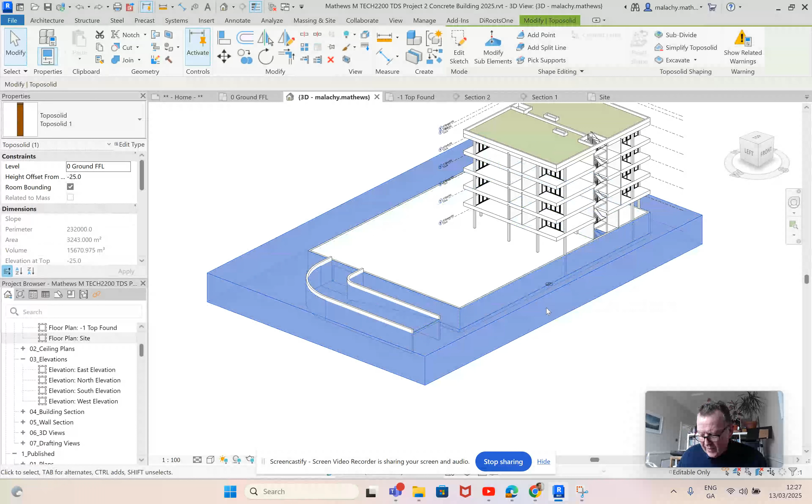Right, we've got our topo in place here. Let me show you how I did that. We've got our ramp in place. We're going into our site, and so we're going to put in a Toposolid.

Now, the last project that you'll be doing this year is one where you'll have a site in which you'll place your domestic building, your steel building, and your concrete building together, and I'll be supplying you with that site. But for this exercise, for the concrete project, we need a site, because there's nothing worse than having the building floating in mid-air. So we can always hide it or delete it when we go to the last exercise, and you'll just move the building onto the existing prepared site for you.

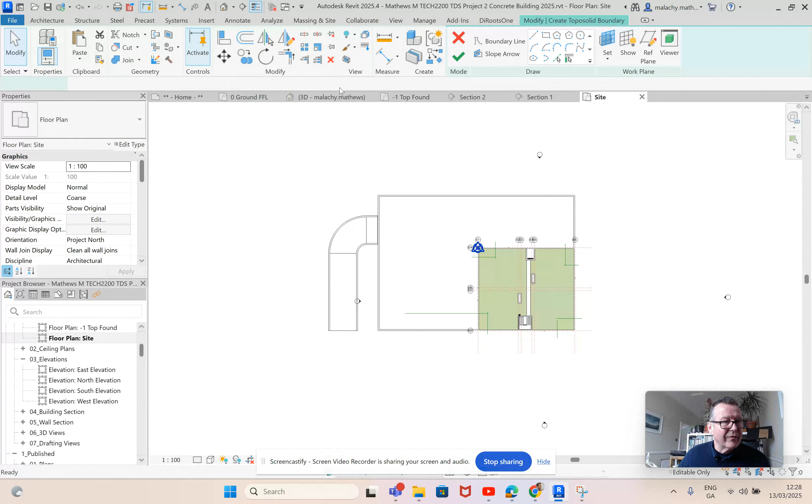So I'm into massing, Toposolid from a sketch, and I'm just going to surround the building something like so. Okay, let's go into the properties of this here and see what we've got.

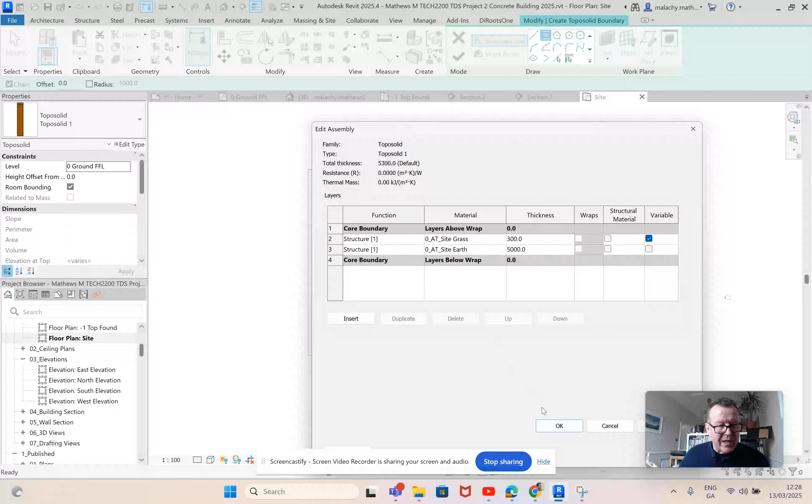So you might need to add in a couple of materials here. I put in the site grass at 300 and the site earth at 5 meters here. You'll find those materials in your materials library. Like so, and that's fine.

I've got a solid fill and a brown color here for the coarse scale fill as well. Now I'm going to put this in at -25, so it'll just come in below the slab here, and we'll finish that. Don't attach any walls here.

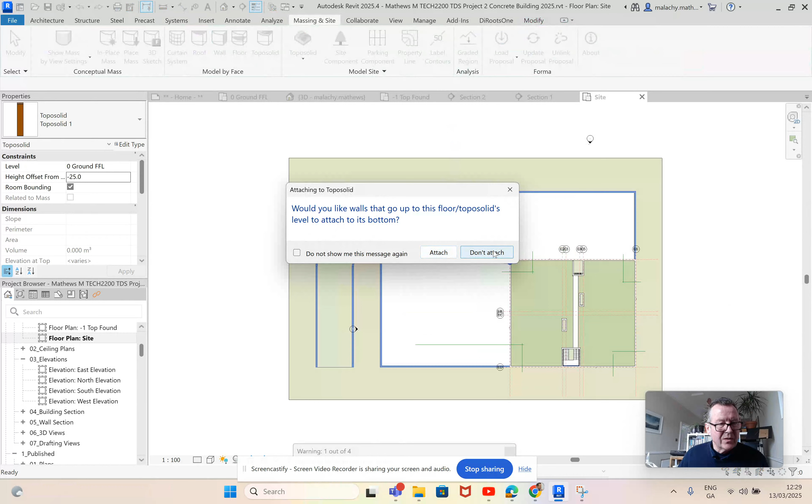Now let's take a look at that in 3D. So I've got my slab exposed here, and for me, that's the way I'm going to do this. If you were to put some grass in on top of this, you'd want a minimum of 300 mil in order for the grass to grow.

And if I had to do that, I'd have to drop down the level of the ground floor slab and all of that kind of stuff. I'm not going to do that - I'm just going to pave this area here.

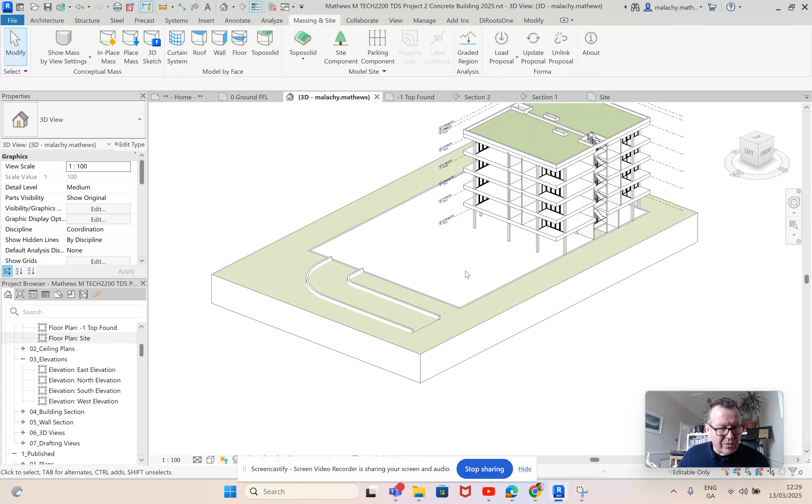So that's part one. Part two is if I go into a section now, you'll see where the problem is - we've got earth in our basement, and we need to get that out. So there's two parts to this.

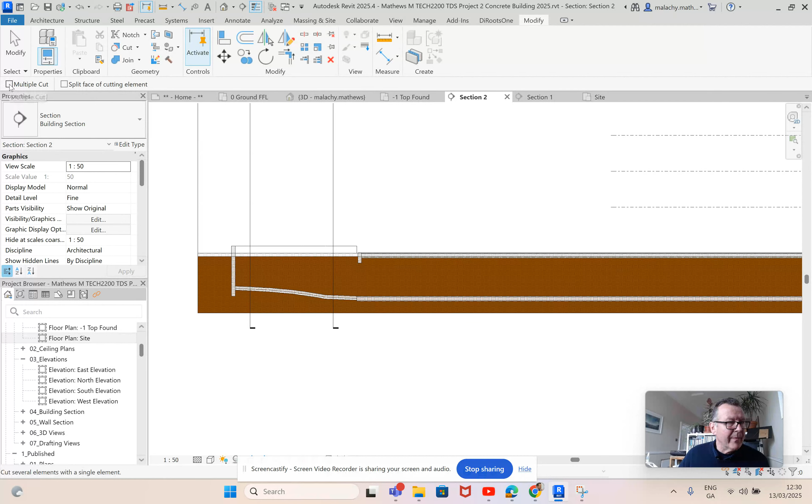What we're going to do first is cut the topo from the walls and the floor slabs here. So we're going to go into modify, into cut. We're going to say multiple cut here, and we're going to take this and take it from there, and from here and so on, and we'll find each of the slabs. What we want to do is expose the walls that are there.

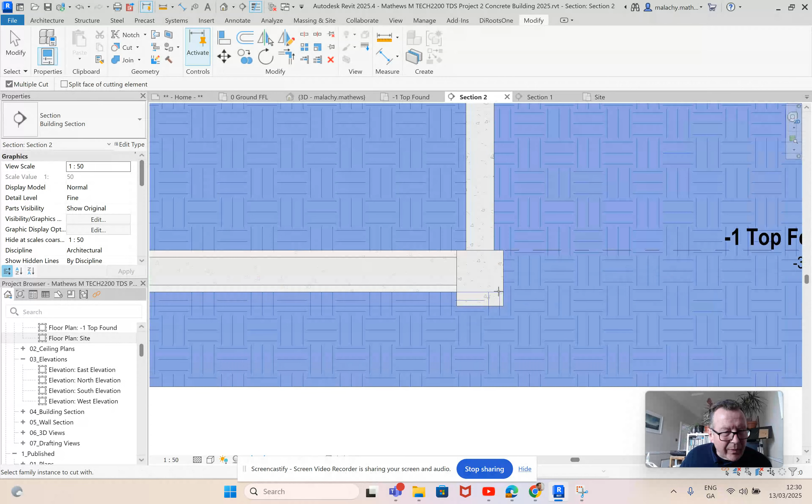And is it coming up on this? It is, yeah. I want to remove it from there as well. Escape.

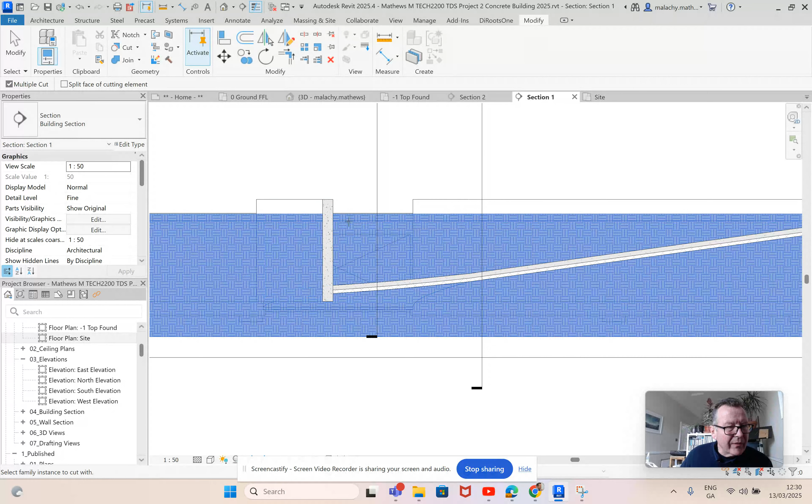Okay, let's go into the other section here now, and we're going to have to do a few of these to make sure we get all the walls in. Thankfully, there's not tons of walls in this. Cut multiple - cut this from that, that one is okay. I think that one is okay. Yep, all right, we're looking good there.

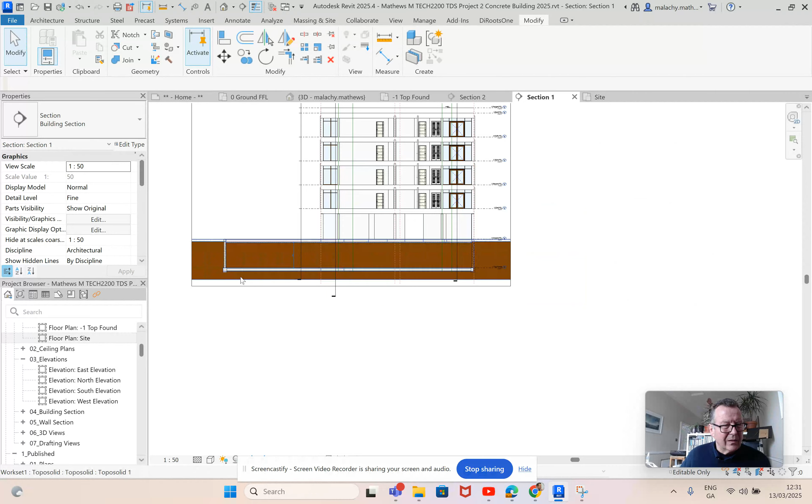Escape, back into the ground floor plan, and I'm going to take that section now, move it up here, and yeah, we need it here. So it's going to be cut - multiple cuts, and cut this from that, and from that, and from that. Now, if you're going to take a section through any of the pads here, you'd probably need to do that exercise for the pads as well.

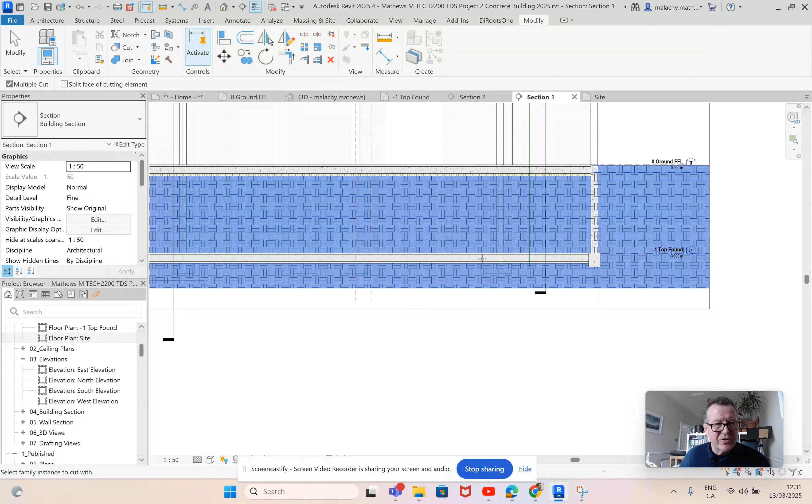Okay, and there's that wall there too. Now if we've cut all the walls out, let's just go back into the site plan. Escape, ground floor plan, and I might just take this one, shift that back there.

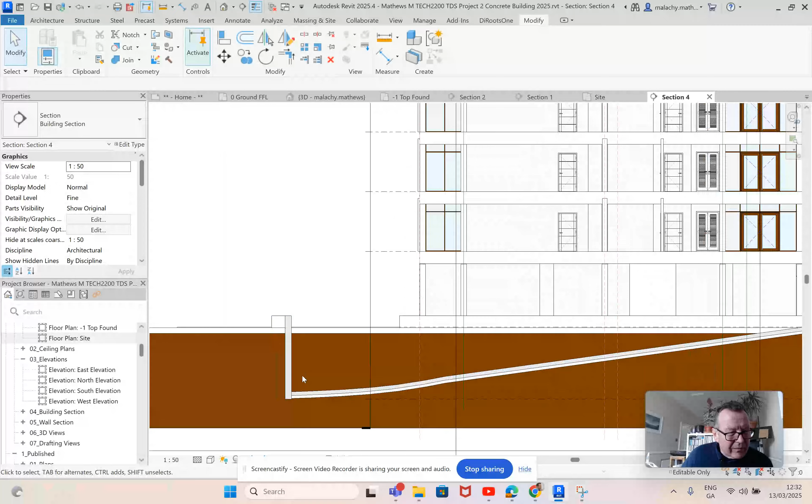I just want to make sure I've got all the walls out here. So I think that one is okay, and that one's okay, right? Back here, let's move it up there, see if those walls are out as well.

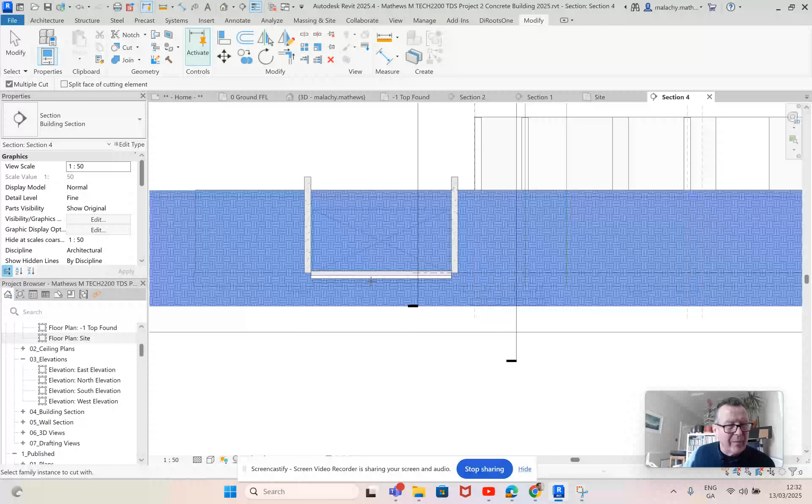No, we need to do these ones, so cut this from that. Okay, and it's already gone from there as well. You might need to extend those walls down a little bit to put a foundation underneath them as well. So that's what the sections show us, and that's grand.

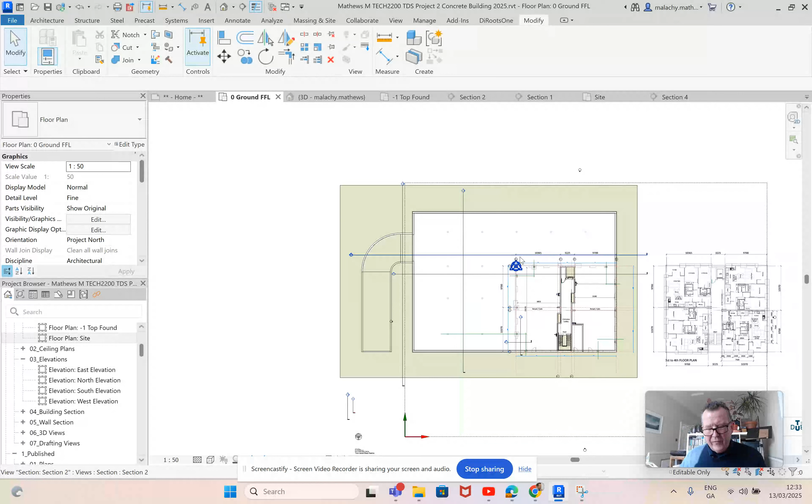Right, now how do we get the earth out? I'll go into a ground floor plan here from the basement. So we're going to do a void here and see if that works for us. So we'll do an in-place void, architecture component, model in place.

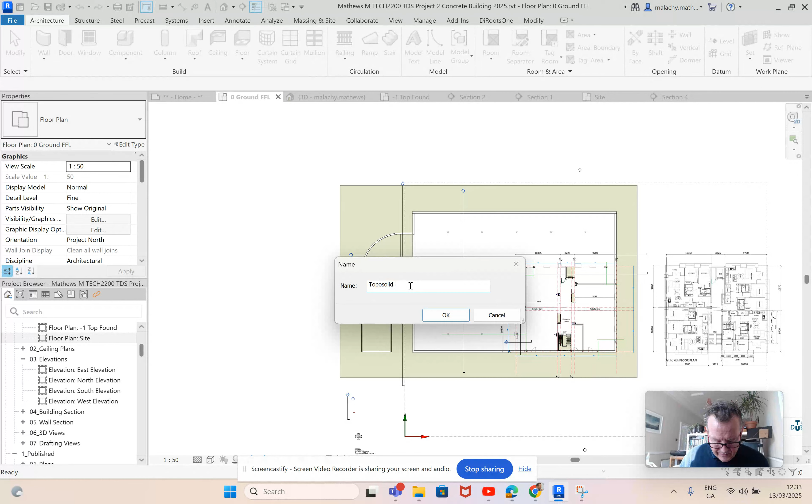Now this was Toposolid, and I just call it Toposolid Plus Void 1. Okay, that gives us access to the forms here. It's a void form that we want, and it is a void extrusion in our case.

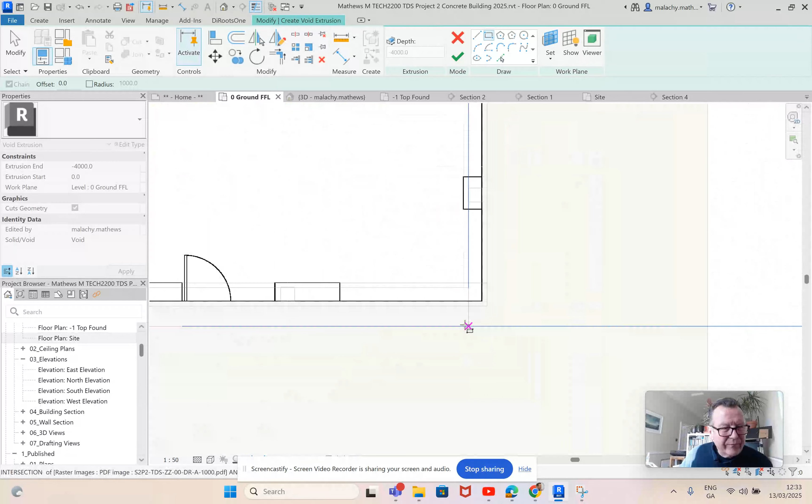We're going to go from that corner, okay, to that corner, and everything else in between.

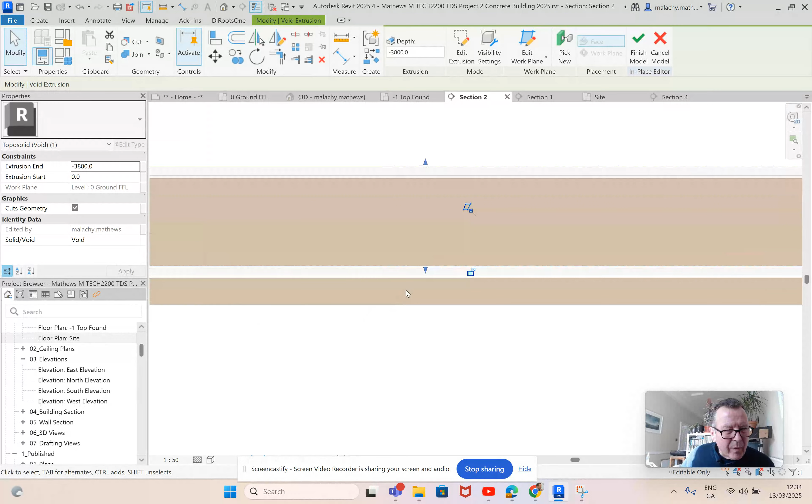Okay, now let's go into a section here. There's the void. All right, so we just want to bring it up to that level. Sorry, we want to bring it down to that level. Okay, now get our cut tool, and we will cut from the topo, cut the void.

Okay, now that's that one done. A few little adjustments to be made on some of the columns there. I see that, finish that.

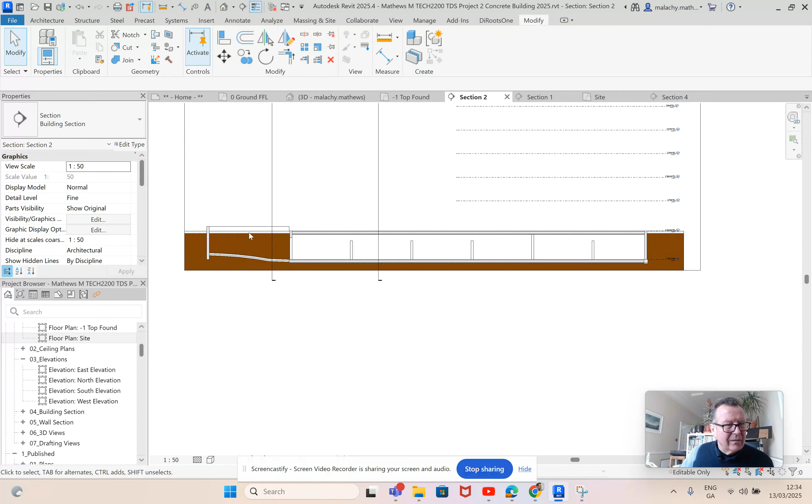All right, now we come over to this one here, and this can be a little bit trickier, but let's have a go with it. So same again, architecture component, model in place, topo solid, and this will be a Toposolid Void 2, right?

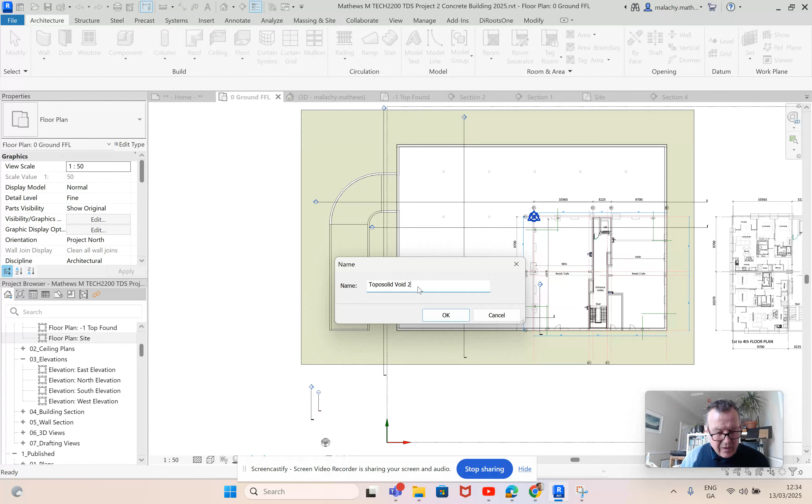Okay, and it's a void extrusion, and we're going to use the pick line here now. So on the outside here, all the way up there, we have to join those, and down here we have to join those.

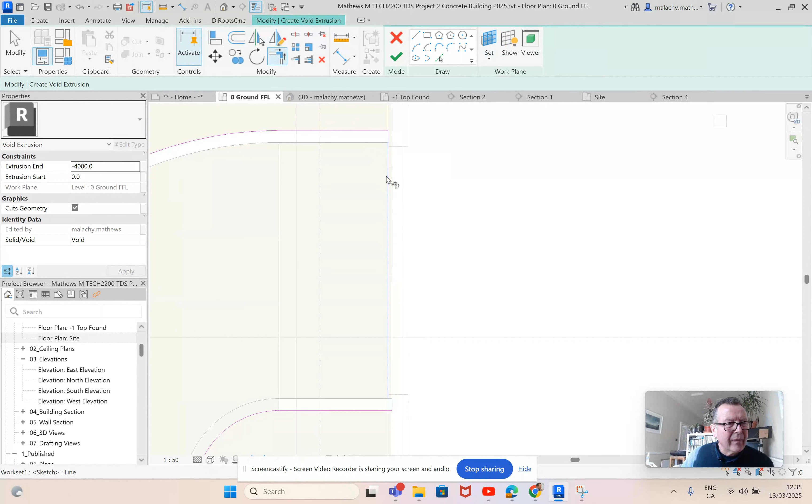So fillet this to this, and this to this, and down here as well. Fillet that to that, that to that. Okay, now let's do that. That's done. Let's get a section through there.

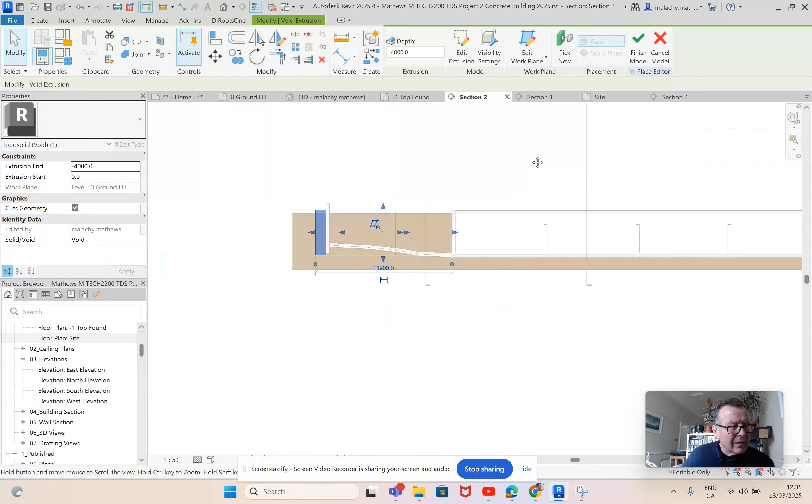Now, so what I'm going to do is we'll have to do some fill in here at some point. So we're going to drag this down to more or less that level there. And it's up there. Okay, so we're going to cut now from this, cut that, and we'll finish that.

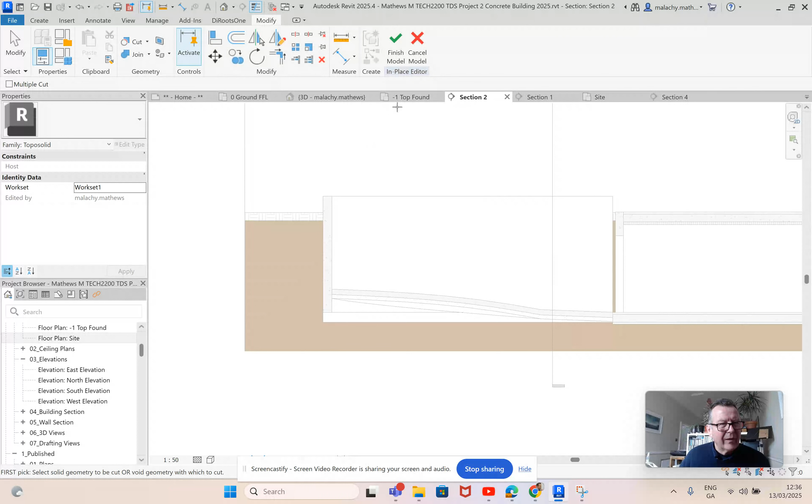Okay, something like that. And let's get into a 3D and take a look. All right, so that's nicely done, and so that's your topo solid there, and your voids.

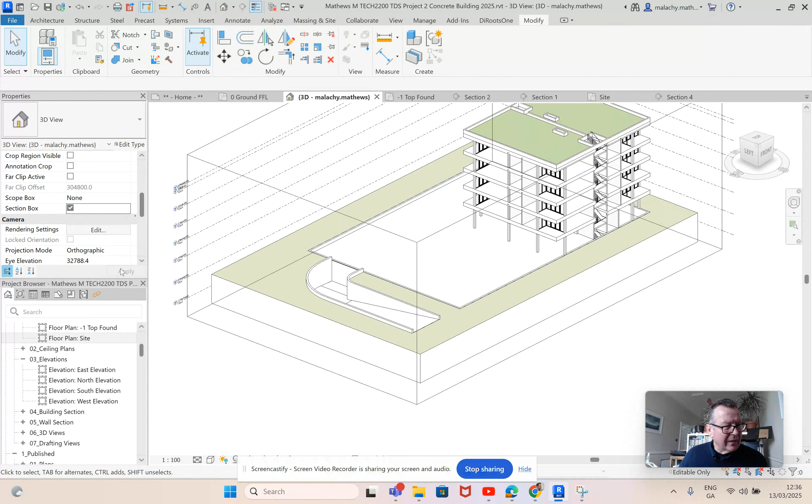Let's just put in a section box here. I like the section box to be able to check things. So go through here. Now you can see that that is void in there. And it all depends on how you're going to construct that.

You know, if you're going to be digging it out to get the ramp in, do you leave the earth in? You know, do you fill it full of stone or whatever else like that?

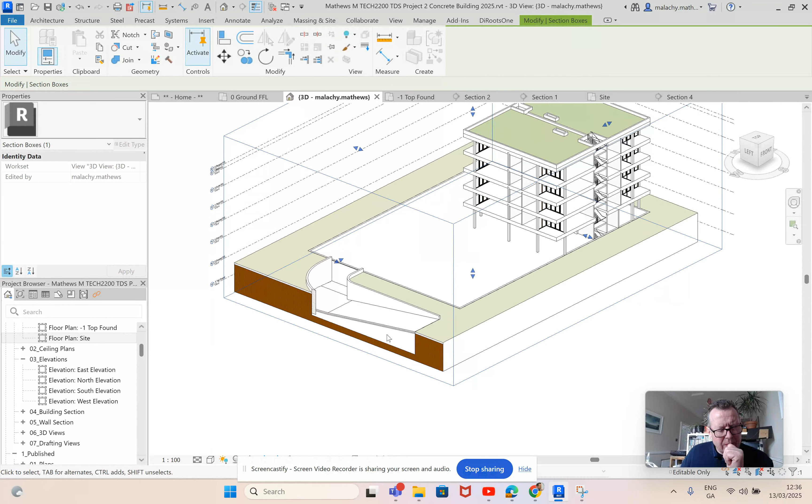Probably a neat little solution that we could use actually with the floor on that. We do have a variable. We have one layer that we can use as a variable, and so we could actually make that fill in down here as well. Not hugely concerned about it there at the moment, you know.

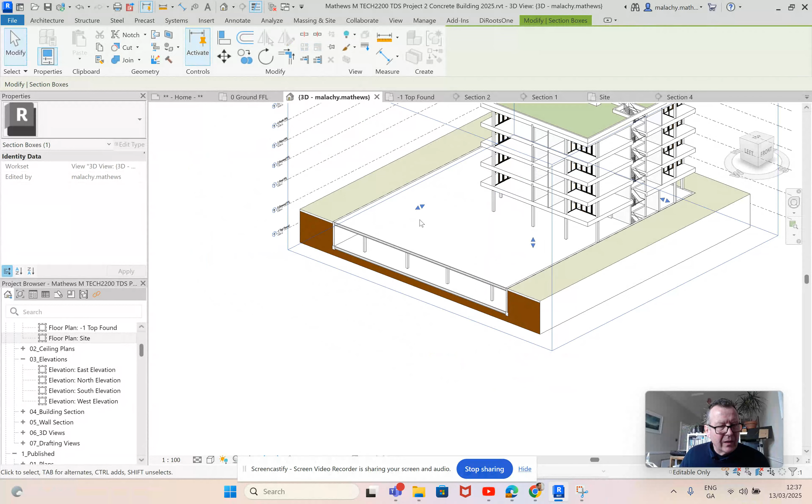We'll get to it. Now that's what I wanted there. Okay, that's how it should be looking in terms of the section through the car park area. Okay.